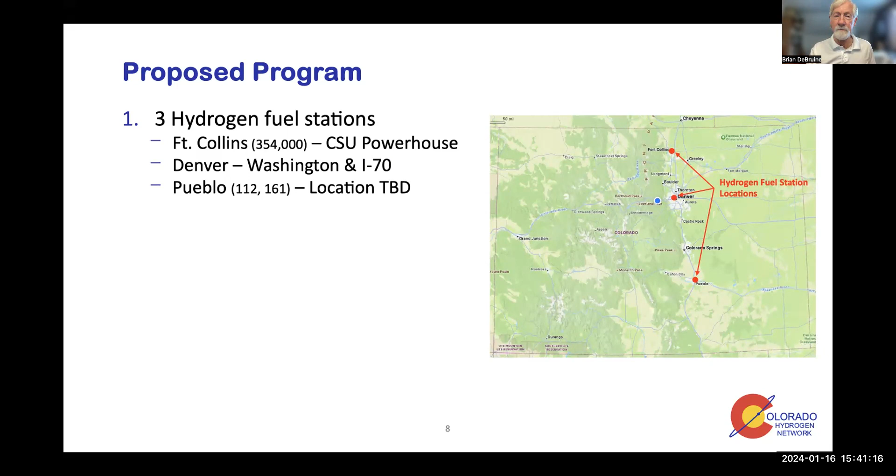All right, so another part of the proposal is workforce training, which of course we can rely on the university to do.

We're certainly going to need people to operate and maintain the fuel stations and so forth. Also, part of New Day's business plan is enlisting fleet users for the medium duty vehicles, and they've already got letters of intent from a few of the fleets out there because we've got to have customers for these stations. We didn't feel it was right to just ask for money for the stations without some kind of plan for who's going to buy the hydrogen.

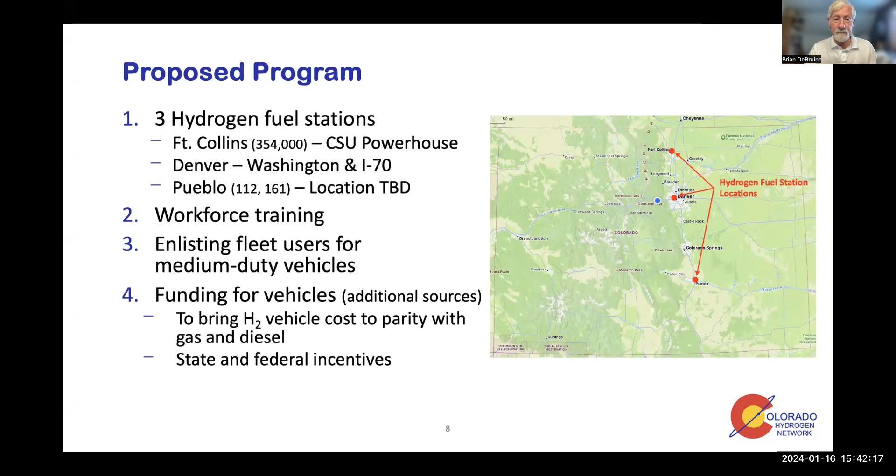This funding is not for vehicles, but the state of Colorado has a number of avenues for getting funding for vehicles to help match the price of the hydrogen vehicle to what fleets are paying for gasoline and diesel. There's also some federal incentives there as well. Then the other part of the program, as I mentioned, is this 20% match, which we're expecting to come from equity investors and donations.

All right, I want to pause there. I don't know, Seth or Buford or Andrew, you want to make any comments?

I think one of the real strengths in this proposal is the folks that supported us through this process. We got letters of support from the city of Fort Collins, the city of Pueblo, the Globeville community just north of Denver. We got letters of support from Senator Bennet, from Congresswoman DeGette, and a host of other folks that were a huge part of why we ended up with this. Brian made reference to several of the fleets - they also provided letters of support via Mobility Services, Fluid Truck, Colorado Car Share. So a lot of folks providing a lot of support that I think really pushed it over the edge for this to be a selected project.

Well, thanks, Buford. That really speaks to the work that you and Seth have been doing for at least 2 years, laying the groundwork, talking to these fleets, talking to the sites. So much work has gone into this, and I think that really showed in the proposal, and I'm sure that's part of why it was won.

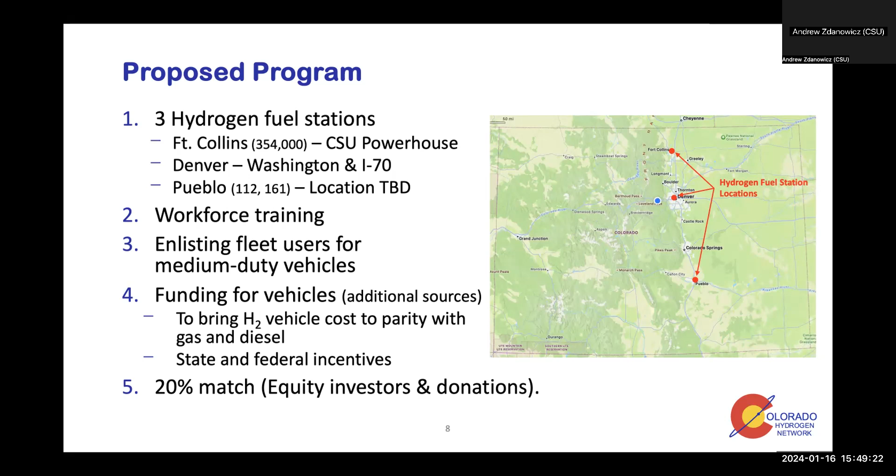One of my primary responsibilities is the active installation of an electrolysis bank for our facility. It's a NEL C20 that we're trying to bring online to provide hydrogen for our own research consumption, but now we're turning it into a public facing utility as well. I'm largely responsible for project execution here, and I help out with grant writing, including this hydrogen refueling network.

I know you've presented a few times, but we've always got new people joining, so wanted to make sure everybody knew who you were. What Andrew was talking about here is the powerhouse facility, and some of the items like the solar Centaur 40 gas turbine and so forth was what he was referring to.

Let me talk a little about the Fort Collins station. Most of you are familiar with this back in 2020 — Sean Honorato from NREL, who's on the call, and I worked on it. Sean, it took us about 4 months to convince NEL to donate a fuel station that was going to be decommissioned. It was actually Proton On-Site at the time, and NEL took them over. It was built, I think, around 2014, or at least redone in 2014, so it was getting a little old. One issue was that it had in one cargo container the electrolyzer plus all the electrical switching equipment, circuit breakers and things like that, and that really didn't meet code anymore.

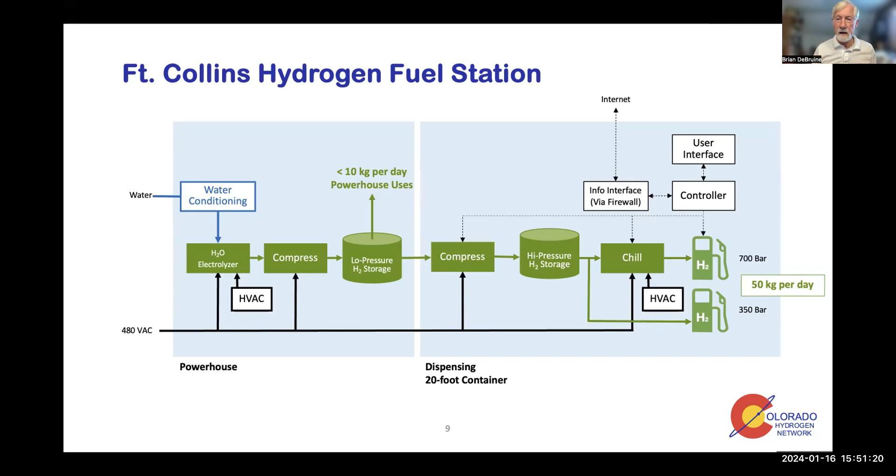So what was decided was to bring the electrolyzer and some low pressure storage into the powerhouse building and then have a dispenser outside. This isn't going to be an all cargo container type of station — it's going to be split up a little bit, and this diagram illustrates that. Now the dispenser is shown as this little tiny blue box, but it's probably not going to end up looking like that.

The electrolyzers, the stacks, are going to be inside the powerhouse. There's going to be low pressure storage, and then high pressure storage and dispensing is going to be outside. We're still developing exactly what that's going to look like.

That's correct. The only other piece is the low pressure storage. We're going to have two tanks essentially: one to service our daily draw here in the powerhouse if we're testing an engine or what have you, and then dedicated high pressure cylinders for actual vehicle refueling, public facing.

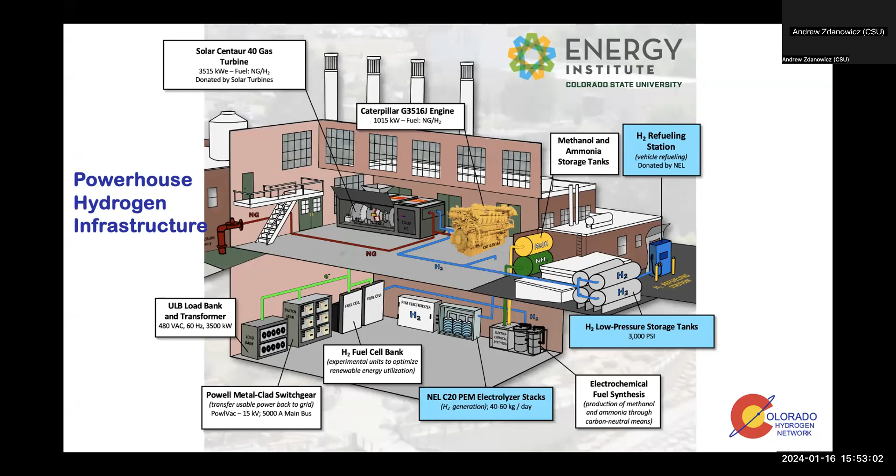This was a pretty big overhaul at the powerhouse. All of these projects here, since we have so many ambitious PIs, are battling for space. Everything is kicking one project out to fit some new technology in. We actually had to build a new floor for this installation, so the first six months of working on this was literally a construction project. It's been a big overhaul, and excited to keep doing it, I guess.

Oh, by the way, tell everybody what PI stands for. Sorry, principal investigator - that's academic lingo for you. Basically the top dog, the leader of the project. Almost like a project manager, maybe. But yep, the one who went and got the money.

This powerhouse building is called that because it was an electrical generation building for a long time. All of the turbines and things were removed, and it stood empty for a while. Then the university grabbed it, added on to it, and now it's this great research institute. So a great asset that CSU has got.

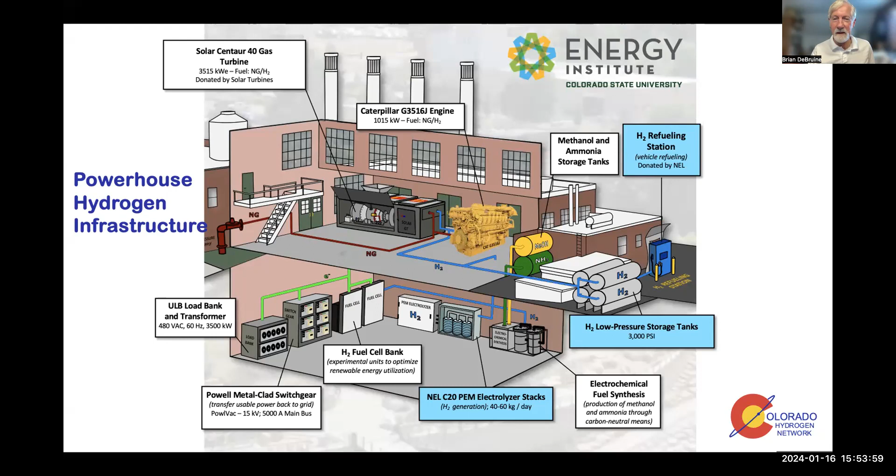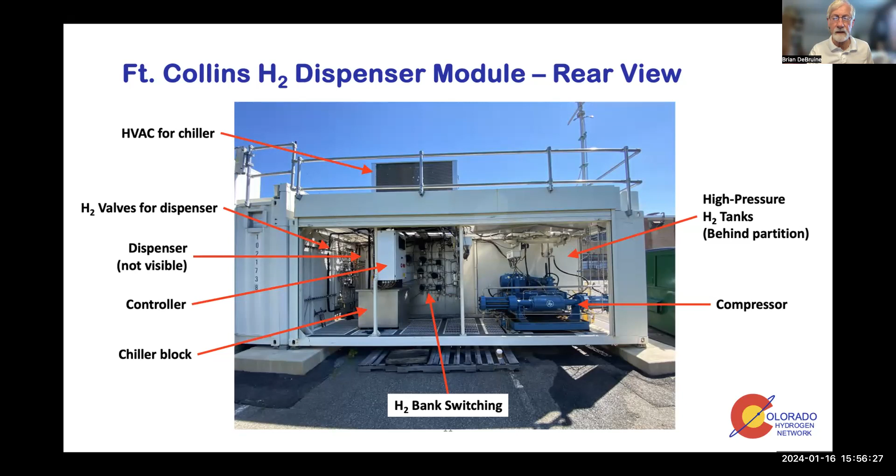So that's the design for Fort Collins. Now the Denver and Pueblo stations are going to be identical, and they will be three cargo containers - I'll show you that footprint in a minute. One container is going to contain an electrolyzer, and of course there's got to be a cooling system and water conditioning to support that. Then another container will have a compressor and quite a bit of hydrogen storage, 210 kilograms worth - that's a significant amount of storage.

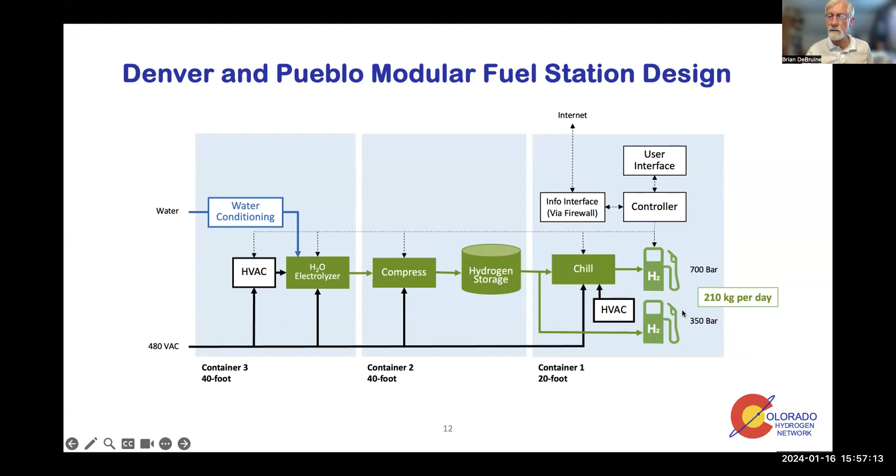And then the dispenser container will have the chiller for the 700 bar. This will have the user interface and, of course, the nozzles and so forth for dispensing. And that's the plan at the present time.

So what that looks like physically, and this would be like bird's eye view looking down on the containers. Of course, these could be configured any way you want, in an L or a long line or whatever the site kind of dictates. But this is probably the most compact, showing the electrolyzer, the compressor and storage tanks in two 40-foot containers.

And dispensing and control in a 20-foot container. I'm showing the dispenser at the end, but you could maybe have it on one of these sides as well. Now, if you want to double the amount of hydrogen produced and stored, all that's really needed is adding another electrolyzer and another compressor and storage tank container.

Beyond that, you might say, well, could you do that again? Add another copy of the compressor and storage containers. Well, probably not, because I think you'd start running into conflicts at the dispenser where you'll have long lines of people.

Seth interjects: So really what we're doing is the intent would be to stack the same entire module unit one on top of the other, and we just feel like that will provide a lot more flexibility. It will also help out in the event that we're getting to a little bit higher capacity, larger number of vehicles. It also helps protect against back-to-back fueling requirements. So I think we're just going to stick with that same system regardless, and not try to double up on the dispensing and cooling.

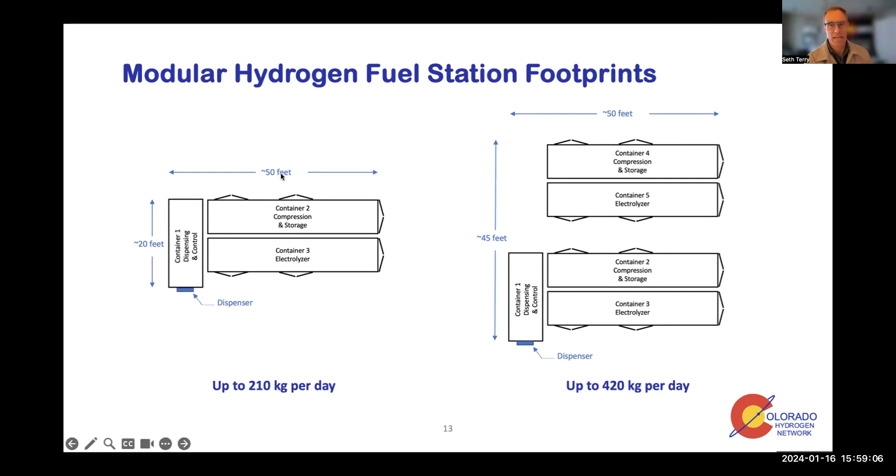So you would duplicate this left one a second time? Yeah, exactly. And then you could separate these physically so that you don't have a line of traffic trying to get to the dispenser and so forth.

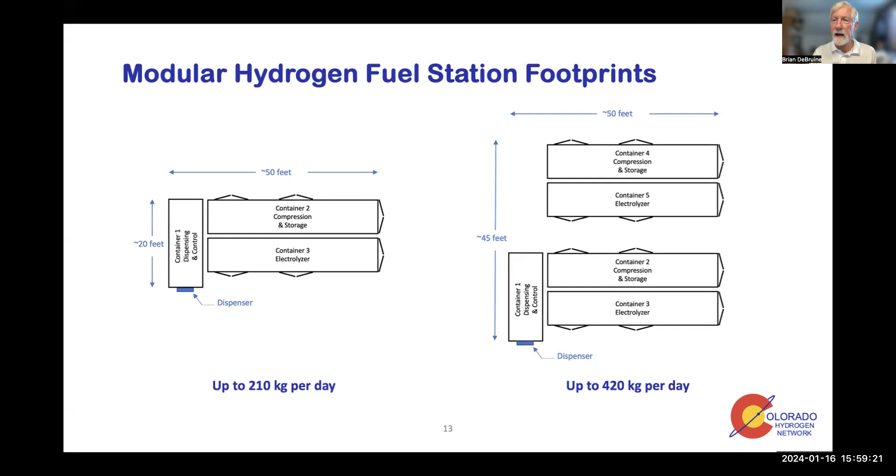Because obviously people aren't going to spread out over a 24-hour day. Most people are going to show up probably during business hours.

Okay, so I wanted to talk a little bit about the proposed station location. This isn't locked down yet, but generally it'd be somewhere near this area of Washington and I-70. And even though it's a mousetrap, as they call it, looking at how you can get there, you can come from southbound I-25, from northbound I-25, and from east and westbound I-70. Not the part of town where probably most people think about buying fuel, but certainly central in Denver.

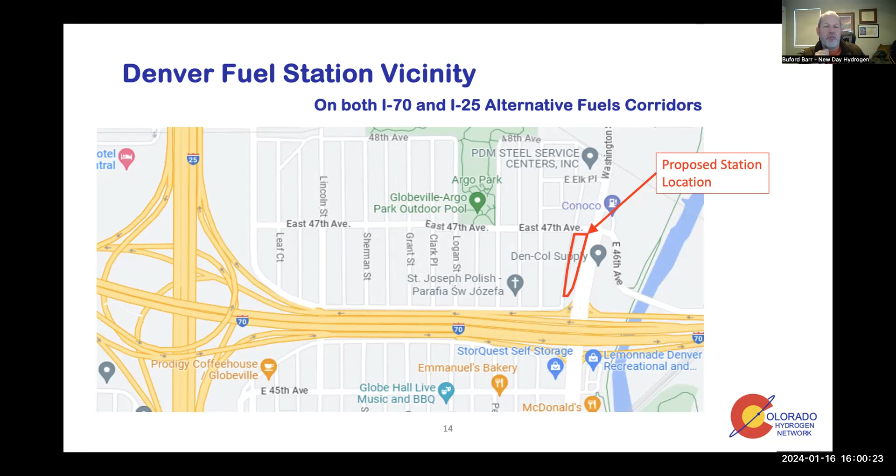Buford, jump in if there's anything that's changed here that I don't know about. No, like you said, we haven't necessarily nailed down the location, but that general proximity in the Globeville neighborhood is what we're looking at. We've got a couple of potential locations in that general area that we're currently evaluating. But you're right, that's the general proximity we're looking at.

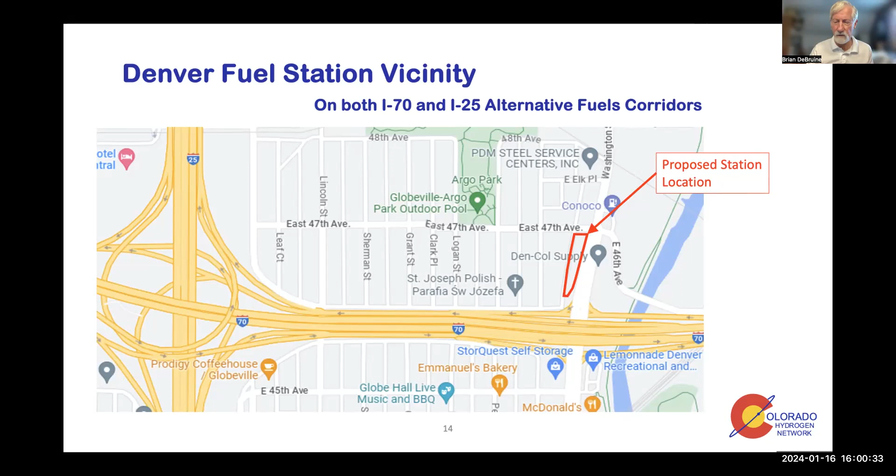And I guess it's to be determined where the curb cuts end up being, but conceivably, if you wanted to keep it simple, you could have people coming north on Washington swing into it here. I assume you can see my cursor - maybe I should go to laser. Here we go. So northbound Washington could swing in here. You could get out and go southbound Washington, come through this intersection to go northbound Washington, and so forth.

So, for clarification, this is one of several sites that we're currently evaluating right now. We don't have an identified site just yet. But one of the keys is that this is near the CSU Spur campus - all three stations are associated with CSU, so they're in the vicinity.

All right, so moving on to the Pueblo location, what we identified in the proposal was a site that was, I guess, verbally at least offered at the industrial park that's there in Pueblo. And what I'm showing here is access. If you're on the north end of I-25, you get off on highway 50 and swing this way - it's about 5 miles, 7 minutes.

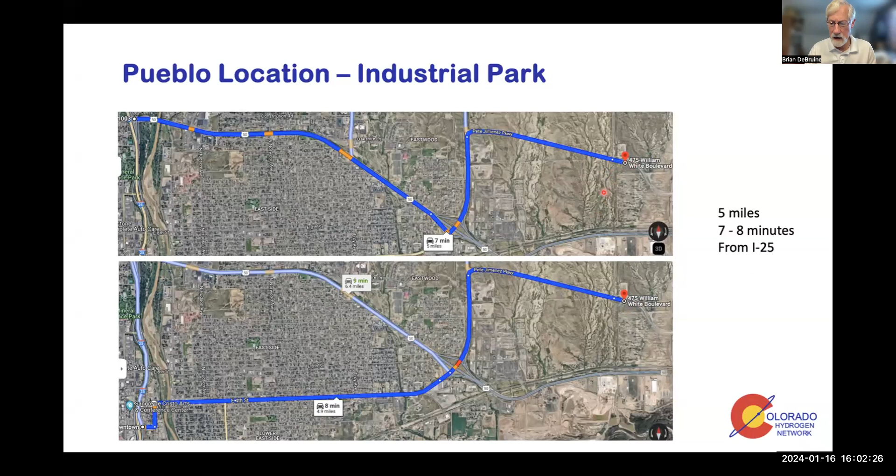Or if you're at the south end of I-25, you wouldn't go way up to that, you'd swing in this way. A little bit of distance away from I-25, 5 miles, which isn't ideal, and this is kind of a remote location. We had hoped - it is, however, a freight corridor, so that's a nice potential there.

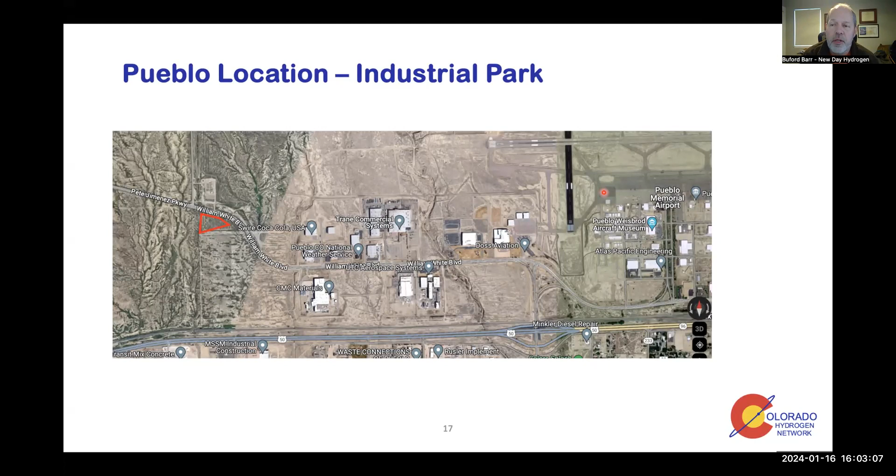We've been in conversations with the city of Pueblo, and they found an alternative location closer to I-25 that could align really nicely with that I-25 north-southbound traffic. So once again, just like that Globeville Denver area, we're still evaluating locations. The locations in the proposal were good, but we're trying to find ones that might be better for potential customers and freight traffic moving through there.

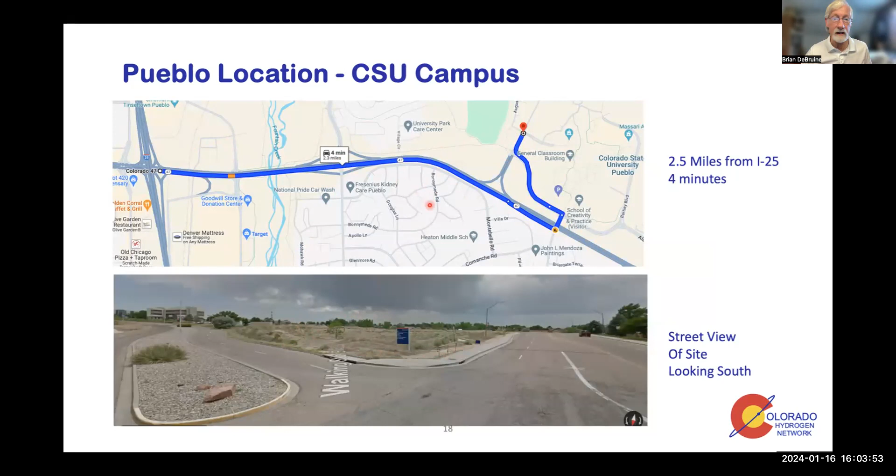This one's a little bit better - it's about half the distance, 2.3 miles. So we'll see where that goes. We'll have to continue having discussions with the university. And as Buford pointed out, there might even be another location.

Here's maybe a little bit better view of where that industrial park site is and the university site. Buford, the other site you were talking about, is that near one of these highways? It's basically off of 50 and 25 right there, just south of where your pointer is. Right in that area.

Well, obviously these things are going to be worked out here very soon. So, all right, let's see.

Sean Daniel, are you on? I didn't look. Before we leave the fuels, a couple of questions, Brian. Sure. This is Howard Gerwin - first time I've been able to actually make one of the calls, so it's nice to kind of hear what's going on. But a couple of questions about the fueling station.

In terms of customer base - you mentioned medium duty trucks and transport. Has there been any discussion about off-highway uses, or reaching out to Toyota, Honda, Hyundai, and asking what it takes for them to make their fuel cell vehicles available in Colorado? Yeah, when you say off-highway, are you talking like construction equipment and stuff like that?

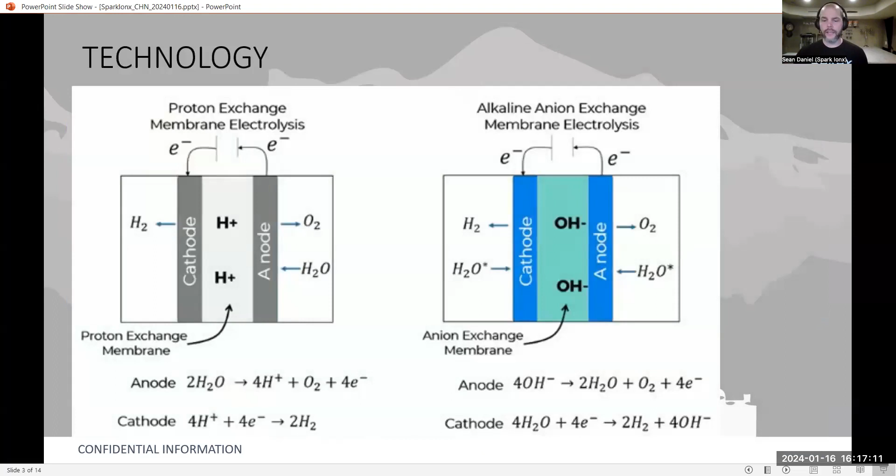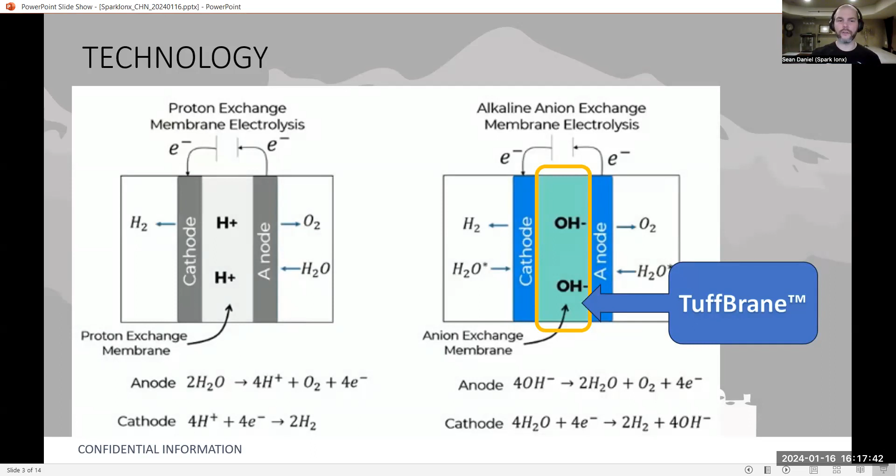Really strong team. And just in case anyone's confused, we're the little thing in the middle between the electrodes, the membrane that allows hydroxide to go between the electrodes. So it's the exact opposite of a proton exchange membrane. And the advantages there are you don't need to use platinum group metals, you don't need titanium, you don't need platinum or iridium. So there's quite a few benefits, and also some fun chemistries you can do in alkaline environments.

But basically, the magic is this tri-block copolymer that makes it superconductive while retaining its structure and mechanical strength. Again, the benefit is you don't need that platinum group metal or titanium, which by our calculation is around $400,000 per megawatt of capacity, depending on what concentration you use. So when you're selling a 5 megawatt system, that's a $2 million discount - quite a bit cheaper from a capital perspective.

When we compare ourselves to other AEMs as far as conductivity, you're looking at a reduction in electrical use, so better efficiency by 12%. Overall, it's a 28% reduction at the start. So if you're buying electricity at 12 or 10 cents a kilowatt hour, that's roughly $1.75 per kilo cheaper, and it goes up from there. So that's what we're trying to do.

We're trying to make hydrogen more economic and help those applications develop.

We've had great results. This is a test by Nel. You can see we got all the way up to an amp in KOH at 1.95 volts. If you know anything about electrolyzer polarization curves, that's pretty good for an AEM. If you look at PEM, it's about double that, and that's why people still use PEM, because you can get a lot of hydrogen out of it.

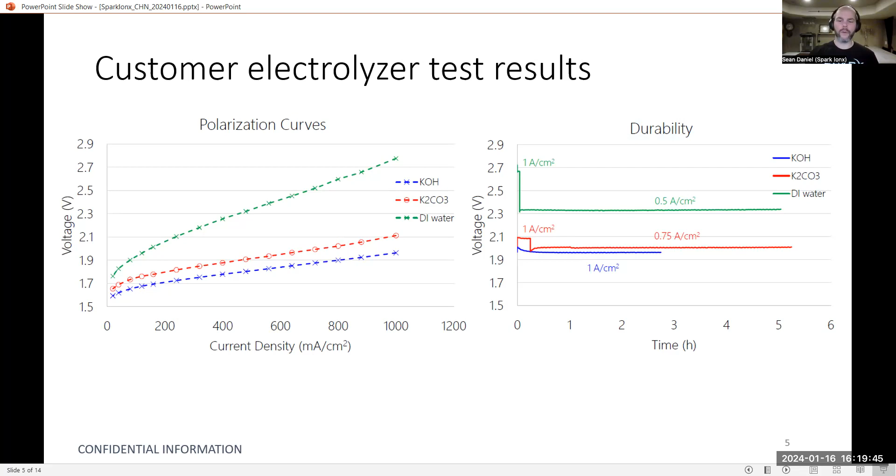But as platinum and iridium prices go up, and with a lot of other considerations, there's a case to be made to switch to AEMs. Also, we've been working on some carbonate electrolyzer development, and we've had excellent results for those who would like to stay away from KOH.

So there's a lot of promise there as well for those looking to do some carbonate type testing. Lower yields, but there are a lot of advantages—you don't have to worry about contamination and stuff like that.

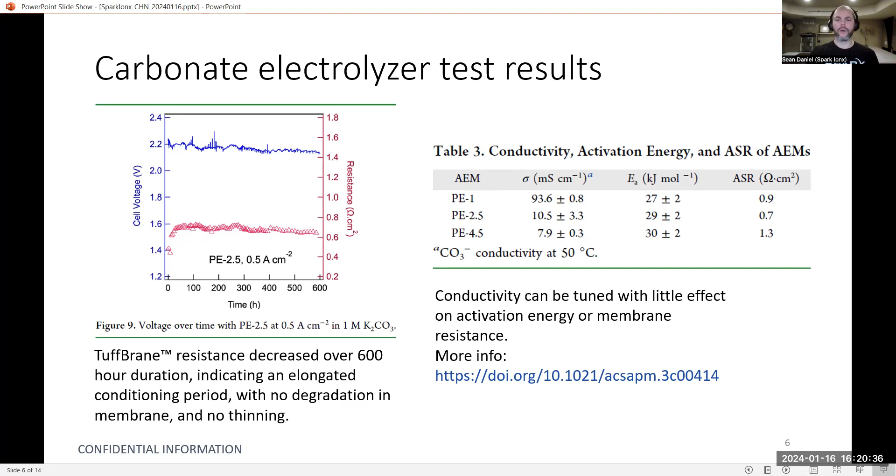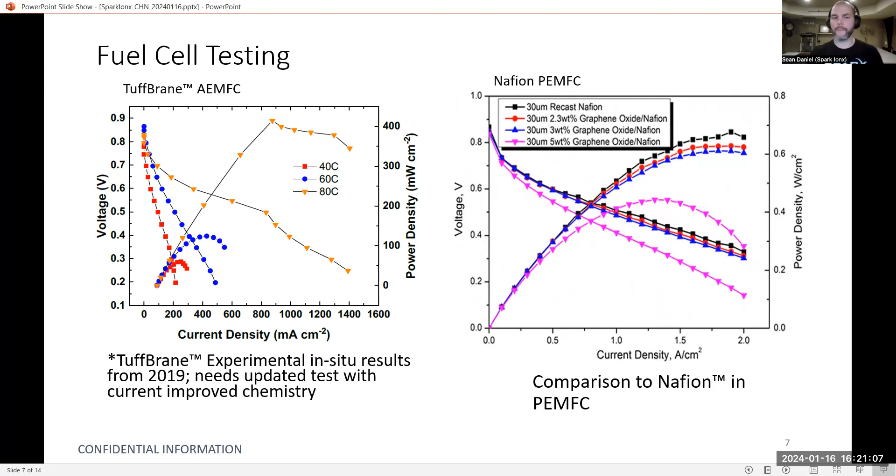So if you know folks who are looking at fuel cell development, we'd love to help out in any way we can.

Right now we are doing our pilot run for samples, sending those out to customers, and also scheduling our large format production run here in April. Hopefully we'll deliver in April or May. So we're really scaling up.